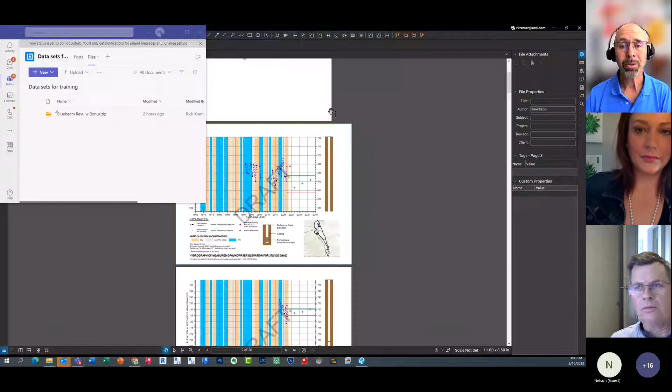This is a real case. I got a case, and this is supposed to show right here in this area a bar, right? I'm going to open up the same document in Adobe, and I'm going to show you what it's supposed to look like.

I thought, oh my goodness, Bluebeam is broken. I have the latest updates, I have the latest video card driver. Let me show you what it's supposed to look like.

I'm going to go over here on my computer and open up that same file, which is this one right here. And if you're the customer that sent me this and you're on live right now, thank you so much for sharing the information, even though you didn't know you were going to.

I'm going to go ahead and open it up with Adobe, right? Everyone has Adobe on their computer. Now let's take a look. This is wild.

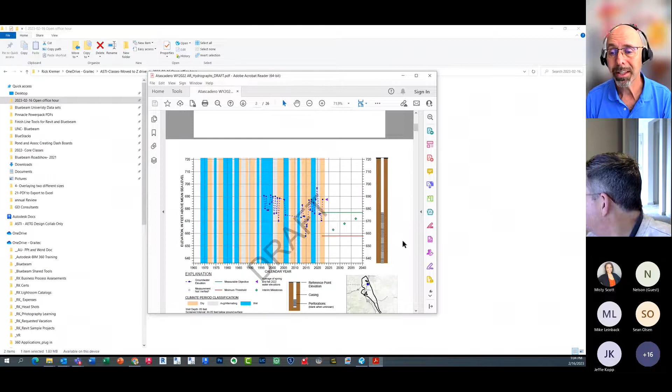I brought it up to Bluebeam and they're like, I don't know, it's something you need to change. Do you see this right here? Page 2, right? I'm on page 2 on this free Adobe Acrobat Reader. This area, I can't even do a rectangle, the shortcuts aren't the same. This area right here, you see the bars that are there?

I'm going to go ahead and split screen. Oh, we got more people. Here's Adobe, here's all of those bars. And over here's Bluebeam. What?

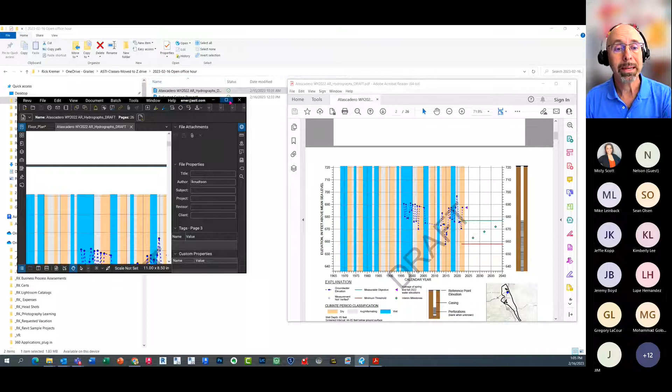And I'm trying to get these to show side by side. Anyway, you got the idea. All right, I'm just going to maximize it, but you guys see this, right? This area is supposed to have bars, and that was a big deal.

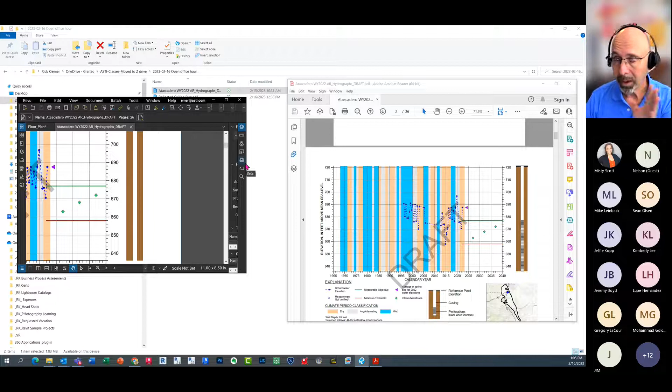This provides some information to the geotech that was being lost in Bluebeam. So here's my recommendation on how to fix this: there is what I call a feature, a bug, that isn't displaying this information correctly. It's all according to your graphic display driver, not the really good one that's in your computer, but something that the Bluebeam application isn't talking to your driver about.

I'm using the new Bluebeam Revu 21, and this was still an issue in Revu 20 and 21. If I go over here to Revu, Preferences, no, About, you'll see I'm working on the latest version of Revu. So the issue still happened in Revu 20.

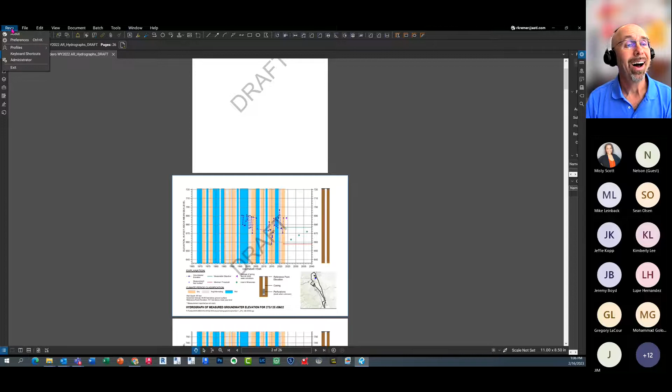So Rick, how do we figure it out? I'm glad you asked. I'm going to go over here to Preferences, and we're going to get into Preferences just a little bit, but I'm going to jump right into Advanced, okay?

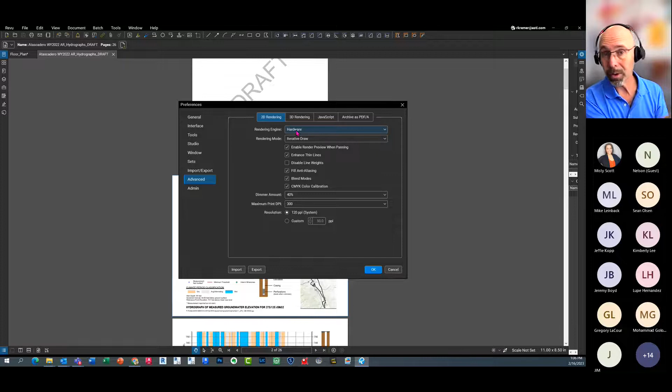Under the Advanced tab, the 2D rendering engine that Bluebeam uses is hardware acceleration. It means it's using the hardware of the video card on my laptop. Instead of using hardware, use legacy. Now watch what happens. I'm going to change it to legacy and click OK.

Did you just see what happened right there? I now have the bar.

So here's the takeaway: there might be things on your PDF you don't even know aren't showing up. So again, put on the legacy 2D driver. It's over here under Preferences, Advanced, change the rendering engine out of the box from hardware to legacy. Life is going to be better.

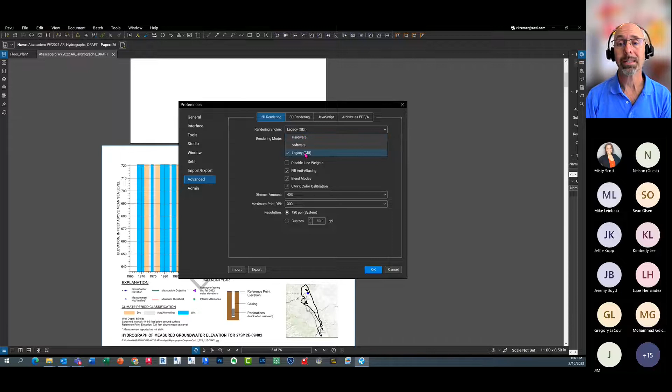I'll let you know at the next open office hours if this changes, if Bluebeam has created some type of update. My guess is hopefully they will, and how to get those updates is easy. What you want to do is every now and then go to the help menu and check for updates. I'm going to go ahead and check for updates, and it says Revu is up to date. I can tell you Bluebeam is probably working on this because that is a big deal.

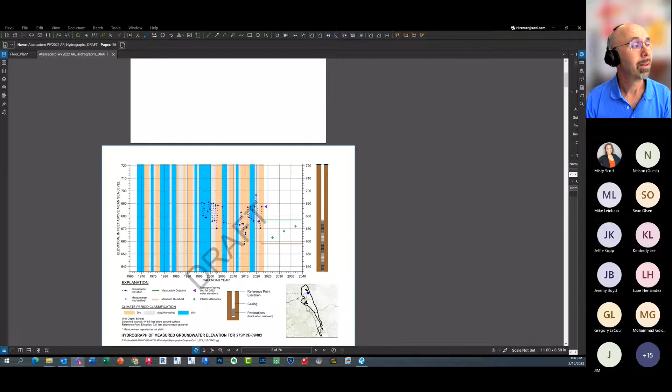So what do you all think? Drop the mic, thank you so much, good night. Let's see, any chat, anything in the chat area over here, Misty, because I am not looking at it. Do we have anyone that's going, ooh wow, yet? Not yet, but I was saying ooh wow in my head. All right, that's what I'm talking about. High five, boom. By the way, that's how we do high fives virtually now, for those of you stuck behind the computer. Boom, there you go, awesome.

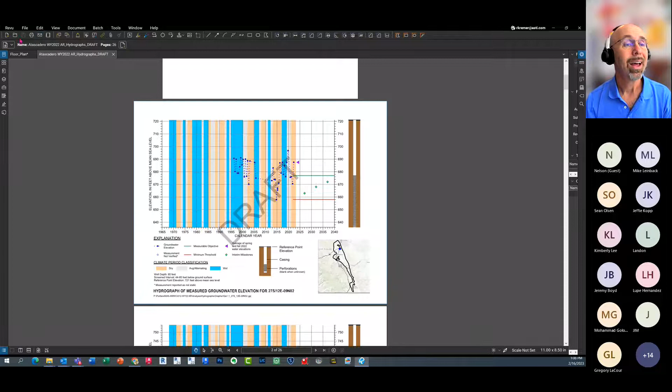So, all right, so that's one thing. The other thing, let me show you some preferences, some things that I like to change, and then we're going to get into a simple little thing of how to customize counting symbols. It's just something I was thinking of. I'm like, yeah, maybe someone wants to learn how to do that.

I'm going to go over here to preferences, and let's talk about some of the preferences that I like to set up on my Bluebeam Revu, which I think you should do too, and why it's so important. Starting over here with general. I just reset Bluebeam minutes ago, right before we got online, and this is out of the box. It uses the username over here that my computer is called, R. Kremer, right? And if your computer is called 1234, your username is going to say 1234.

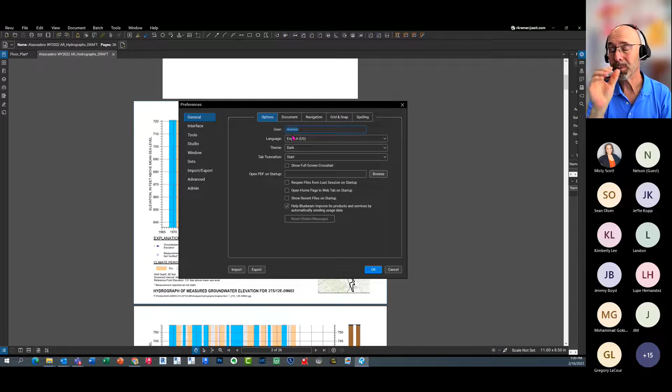Well, why should we care? It's because in the markups list down below, that is going to be what is captured for your author. So the author's name is going to be whatever is the username. So my recommendation is change this to your name. Better yet, put in the name of the company you work for. That way, when you make your markups, guess what? All your coworkers and people you send this to that are outside of your bubble will say, oh, this came from ASTI or GEI or TLC or ABC, whatever it is, you know me. So add the username and change that information.

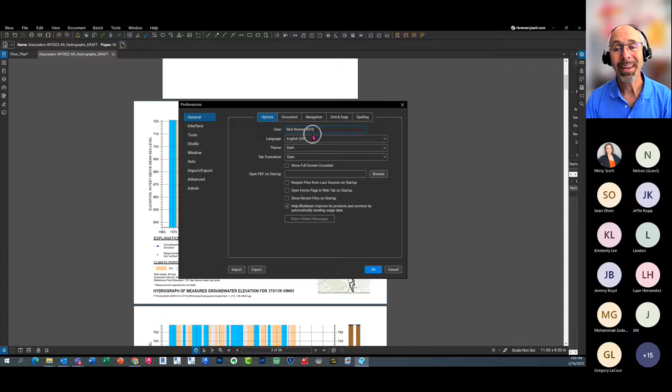Okay, another thing that I want to show you is over here under Window. Now, under Window, I'm going to go back and open up a sample drawing that you can open up on your end, and I'm going to show you something about this text highlighting and why I turn it off. All right, for now, I'm going to hit OK.

I'm going to close this file and open up a sample drawing. All right, I'm going to go over here. By the way, I don't know if you knew this, under the help menu are tutorials that are built in, 3 different tutorials. There's Bluebeam University, which is complimentary to all users of Revu 21. As part of your subscription, you get unlimited access to Bluebeam University. For everyone else, we have Bluebeam Launch tutorials that are built in, and training resources. Tutorials that are built in give us these 6 different things that we can investigate.

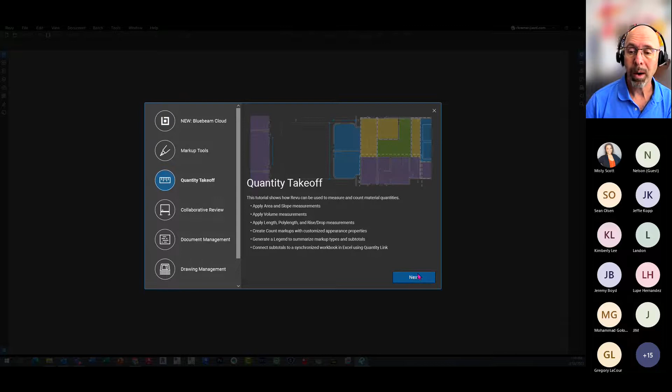For fun, I'm going to open up Quantity Takeoff over here, and we're going to open up a sample file. By the way, you could watch the video over here on your own, grab some popcorn, and learn something, and follow along with the sample takeoff file. By the way, this video right here is this file, and you can follow along. How cool is that? You can kind of learn on your own.

All right, so point being is, if I wanted to go through and highlight text, right? I'm going to go over here and turn on my profile, Revu Advanced, just so I can have all my handy dandy tools up front. And I'm going to turn on the highlighter. Remember, this is out of the box. Now, here's what happens if the highlighter is set as a default.

If you're wanting to go through and highlight just a specific name, watch this. Click highlight, and I'm sure you guys have done this before. When your cursor is not on text, it becomes a highlighter, and you can highlight all you want, right?

If it hovers over text, it changes to highlight that text, but watch what happens. When I want to click on Office, it accidentally will click on multiple things. Sometimes it will click on the break room right here. I didn't want the break room, I just wanted this. So how do we go through and change that?

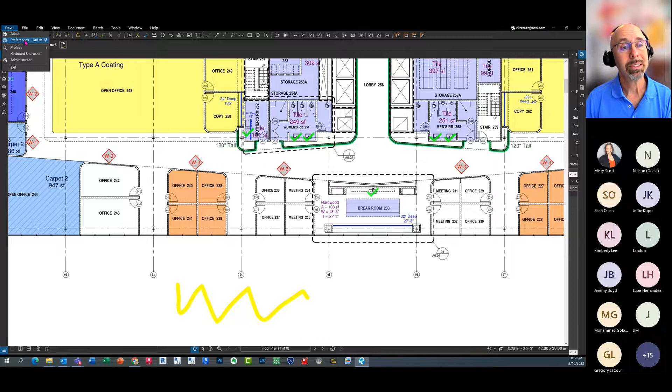There's a setting over here under Revu Preferences that tells Revu not to do highlighting, and I'm going to turn it off. This is under Preferences, Window, Tablet, of course—where else would it be? It's in the craziest place. Window, Tablet, I'm going to disable text highlighting and hit OK.

Now, using H, which is the highlighter, I'm going to put my highlighter on, and guess what? Now if I hover over the text, it doesn't become highlightable anymore. If I want to highlight the text, all I have to do is hold Shift, and I can do a straight line—hold Shift and go straight across, and there it is. Now the upside is you have the highlighter all the time, and you can highlight whatever you want.

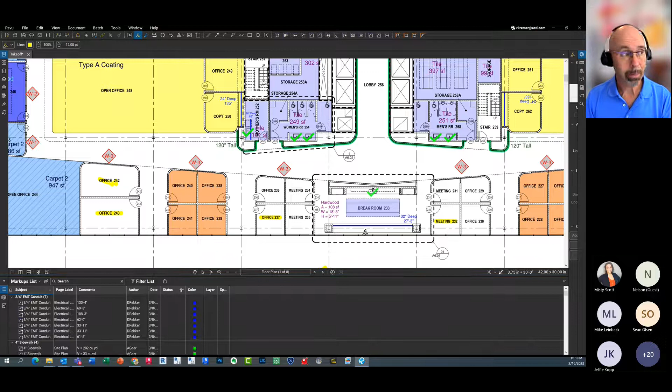One way that highlighting is used out of the box, especially if you're doing specifications—I'm going to turn it back the way it was. I'm going to go over here and turn it back on, and you'll see why this is really a neat feature. I'm going to enable text highlighting and hit OK.

I should open up a specification for this example, but now if I use the highlighter and highlight objects carefully, that information not only is highlighted, but shows up here in the comments.

So here's what happened. I have an estimator that shows me his workflow. He has a set of specifications and a set of construction documents. He highlights the text in the specification, and when highlighting it, he uses the out-of-the-box highlighter, and it comes in with this information for comments. The reason why this is important is because the estimator, in this case, is looking for something very specific within the spec—anything that says, let's say, ASTM 500.

I made up that number, I don't even know if it exists—ASTM 500. When they highlight it, quickly going through the specification, either manually or using search—search is an excellent way of searching text as well—it'll automatically highlight it, which means you can search for it.

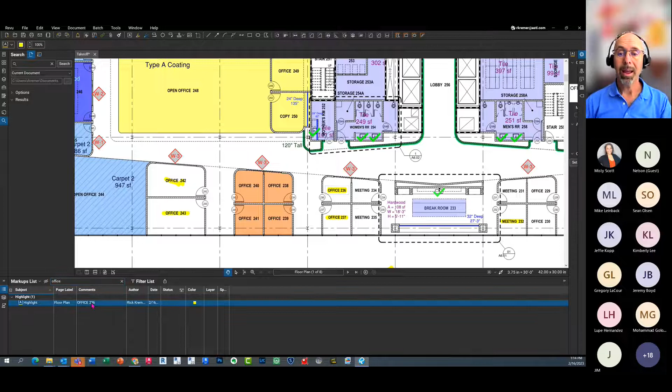Did you ever see this feature and wonder what the heck is search? Inside here, I can search for everything that says office, and anything that says office is now going to just show up in the markups list. I can click on it and find out where that is. But wait a minute—if I'm over here on a different sheet and I click on this, it should take me right to that sheet where it says offices. So that's one of the pros of using the highlighter as is.

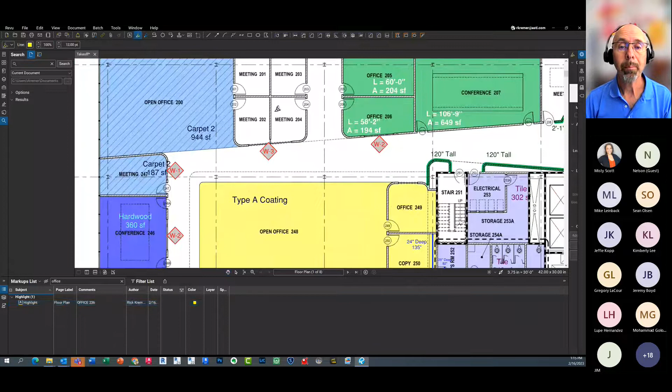I did get one question. Let me see if I can go to it real quick. It didn't come through on the chat, but I got it. The question was, for the zoom scale window alongside page count at the bottom center of the Bluebeam screen, it disappeared from my Bluebeam app—how can I restore it?

Okay, so the zoom information, if I'm understanding correctly—right now I don't have what's called the status bar turned on. The status bar, to turn that on, is function 8, F8. So on my keyboard I'm going to hit F8, and there it is. Now I have the status bar. I think that's what you're talking about, that's how we can set the scale and find out all the information.

More importantly, all of these buttons over here are snap to content and snap to markup, which I usually leave off, but I always leave snap to content on, so it snaps to these objects.

Actually, that's not what I was talking about. Oh, okay—once upon a time, where it says floor plan 1 of 8, to the left or to the right was a small window, and as I zoomed in and out, it showed me what percentage I was zoomed to. So if I wanted to see what this looked like at 100%, I could set it to 100, and I'd have a 100% view. But it vanished a few months ago, and I can't for the life of me find it. I'm gonna get back to you on that one—I don't know the answer. That is a great, great question.

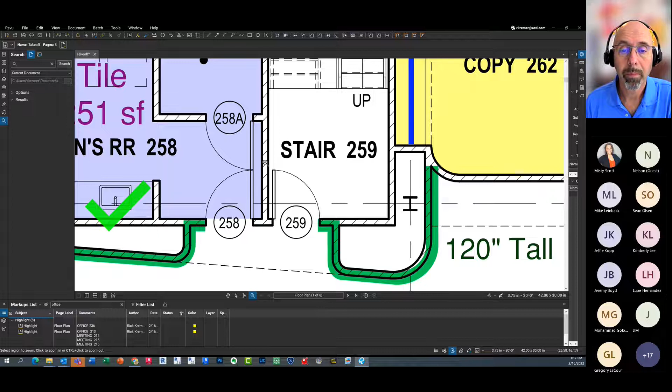Nope, not just zoom. The zoom tool. Yeah, that's the zoom tool, but it doesn't give me the percent.

I understand what you're saying now. I'll be happy to look into it. If you want, put your email in the chat area, and I'll look into that. By the way, if you have similar questions, and maybe you're shy, you don't want to ask them, or you just want to send us questions at any point in time, you can send us a question at bluebeam@asti.com. That's Bluebeam, which you know how to spell, at ASTI, A-S-T-I, bluebeam@asti.com, and say, hey Rick, I have a question I didn't get a chance to ask. Please send me an email on that zoom question. I'll be happy to get back to you on that. That's a really good one.

Rick, really quickly too, Al says there is an option in settings to toggle that. I think you right click on the options and go to the settings, or it's in the file settings.

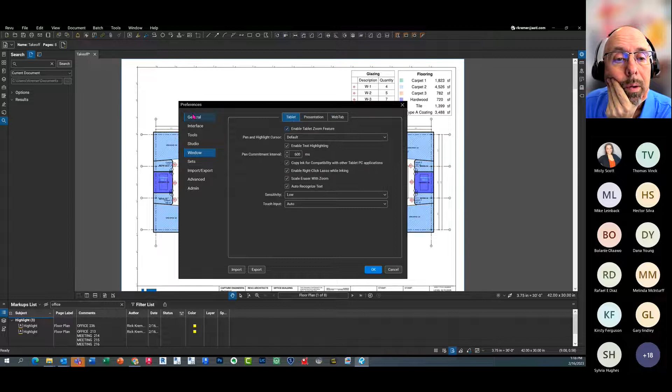See, I love this. This is where we all get together and help each other. I'm serious, this is great.

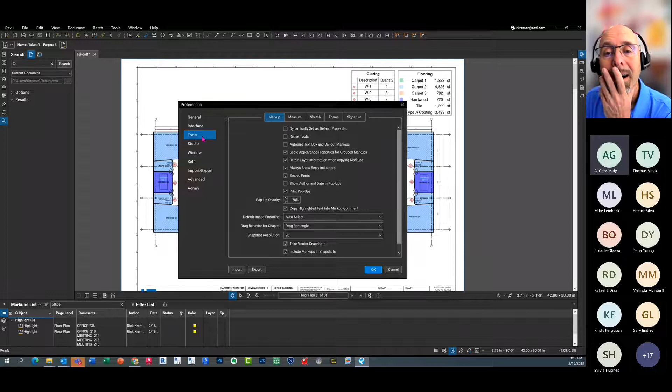I don't see it, Al. Maybe feel free to unmute, I'll be happy to share. Yeah, to be honest, I had someone help me with this because we had the same exact thing happen with us, so I don't remember the exact location of it. I want to say it was a setting in the document, set in the preferences.

Let's see if we can find it. That'd be very cool. I don't see it here. I'll scroll through mine, and if I see it, I'll pop in again. Okay, yeah, that's an excellent thing.

So other things that I want to show you all. My friend Patrick McLaughlin over at Newcomb and Boyd / Pond and Associates, one of the things that he showed me was a dashboard. I'm not going to get into dashboards today because I think that's going to be a webinar topic that I'm going to do. What he did is under General, Open PDF on Startup, browsed and created a dashboard right here, so every time he starts Bluebeam Revu, it opens up his dashboard.

If you don't know what dashboards are, dashboards give you the ability to have a landing page with boxes or images that can hyperlink to different things, which is a great way of navigating around a project or navigating to parts of files that are on your server. But it all started with Open PDF on Startup, and it opened up a dashboard. So I'm going to be showing that, I think, on my next webinar. Maybe not the next one, but definitely one of the upcoming ones.

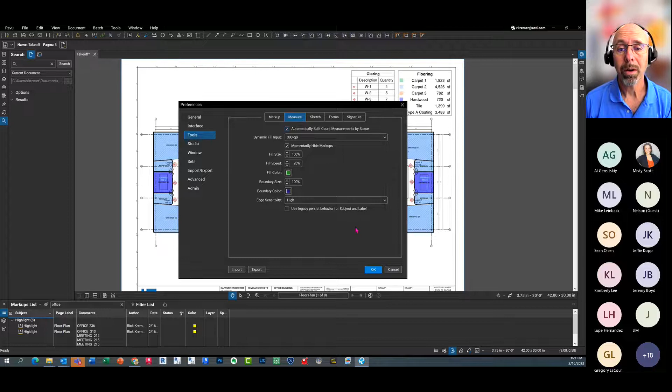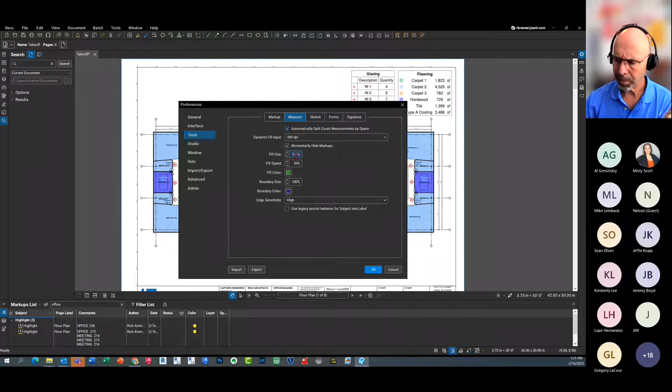Something else that I like to do is under Tools, Measure. For those of you who are using Dynamic Fill, I use it a lot. One of the things that I found is if you slow down the fill speed and boundary, you'll have better results. What I mean by that is dynamic fill gives you the ability to temporarily fill in a location with this green goop, and that paint spills to an edge. I found that if the fill speed is too fast, it's like pouring a 10-gallon or 15-gallon thing of paint, and if there's a little curb, the paint will skip over.

If you reduce this down to 20 - reduce this down to 20, that's, I guess, the lowest you can go is 20% - it makes doing dynamic fill a little easier, and the fill speed just doesn't bump so fast. So when I come over here and I do a dynamic fill, I'm going to type J to do a dynamic fill. When I do dynamic fill over here on this, it'll do it nice and slow.

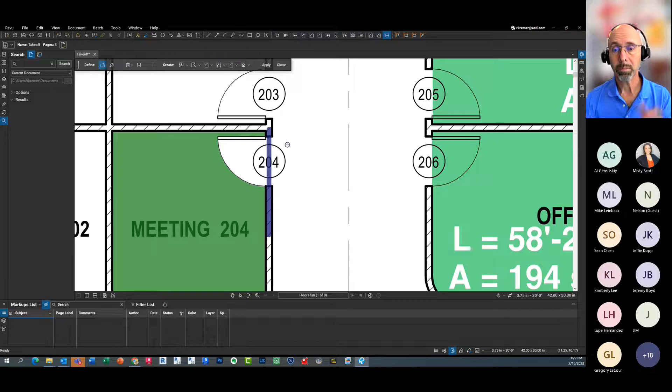Boom. And over here, if I want to fill this area in, I'm going to define it first by putting a threshold. That threshold was determined earlier on, the size, by doing boundary. So the boundary is as small as it gets, which is nice because then over here, it's the size of your typical 4-inch or 6-inch wall. If not, it's really, really thick and that will cover into the room.

And this boundary, by the way, you don't have to be clean about it. You don't have to go from point to point, overlap it, and then go back over here and do the rest of the fill. And over here, oops, I went over.

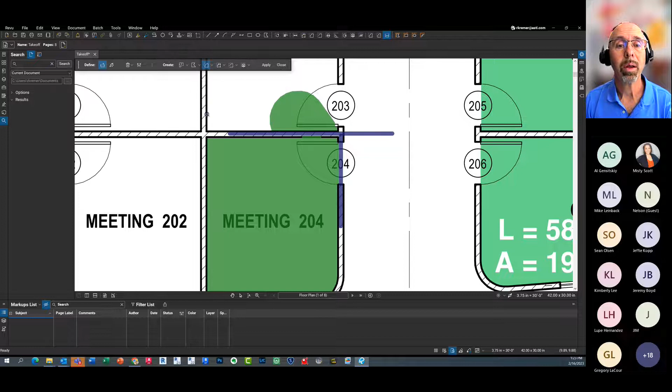Even if I went over like this and it spills over, I can use the boundary again. I'll come over here and click and hit enter, and it just cut that out. It should have removed this as well. I'll click over here to create a fill of phase 1, hit apply and close. There it is. So now I can just get rid of this guy right here. Delete, see ya.

Yay, so we did have a question come in from Gregory that says, can you highlight a wall again? And then we've got a couple more. I don't know if you want to answer that, and I can. Yeah, let's answer them right now. Let's see what Greg has. Greg, can you highlight a wall again? How do you remove the fill?

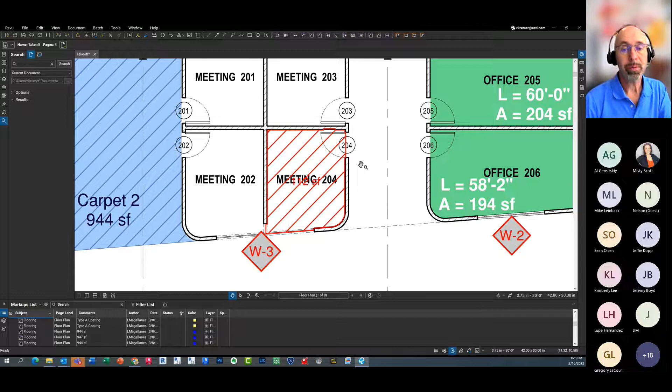Let's do that. So in this case, doing dynamic fill gives us the ability to go through and create square footages very easily, especially when you have odd shapes, like this floor plan over here, or maybe it's circular, and I'm trying to figure out the square footage of this. You use dynamic fill. The shortcut for that is the letter J.

I don't know where they got J from dynamic fill, I don't even think it's part of any of the letters of dynamic fill. So what I did first is I went into preferences over here and changed the settings within Bluebeam so that it slows down, unlike the caffeinated self that I've been drinking coffee.

I go to tools, I go to measure and reduce the fill size. The fill size is the boundary. The fill speed is how fast we're pouring into it. And actually, I'm sorry, boundary size is that 25%. That's the thickness of the wall. I'm going to leave that as is.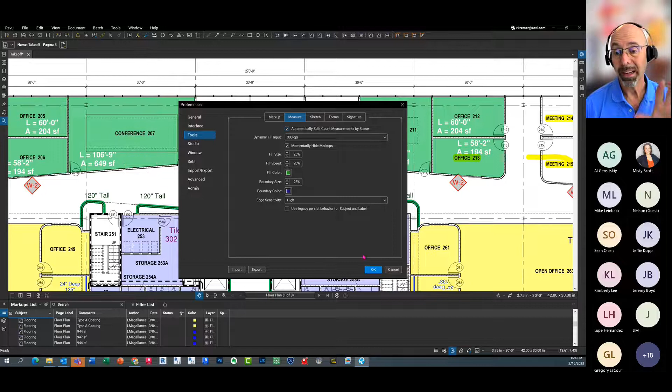And now over here, let's say I wanted to do a dynamic fill. I'm going to type in the letter J, that's the shortcut for dynamic fill. Come on, J. Sometimes you have to hit escape. I've noticed that sometimes my computer thinks it's in the middle of a command, so hitting escape kind of clears everything. Then I'll do dynamic fill. This box right here will be up at the very top, sometimes hard to see.

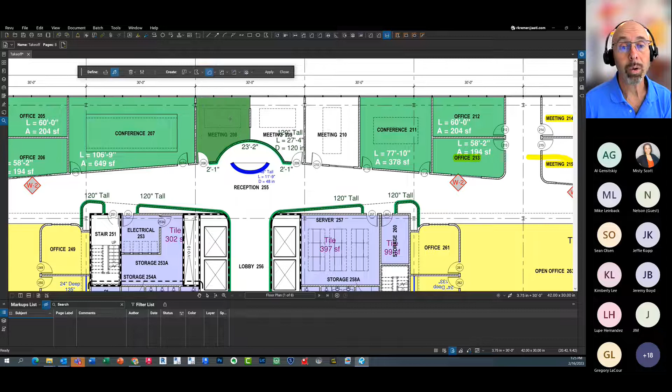I'm going to use fill and left click and start to highlight this area. Now, all I'm doing is holding it. If I go in here, think of it like this is a line. So the paint is going to hit that. If I left click and hold in this area, it continues on.

So what I'm going to do is, if I have areas that I need to redefine a boundary, I'm going to click this icon to create a boundary and come over here and go from here, and here and here and here and here. Let's just say, boom. And so now I've cut that out. That boundary, I have to go back and fill in this area. So I'm going to do fill and fill it in.

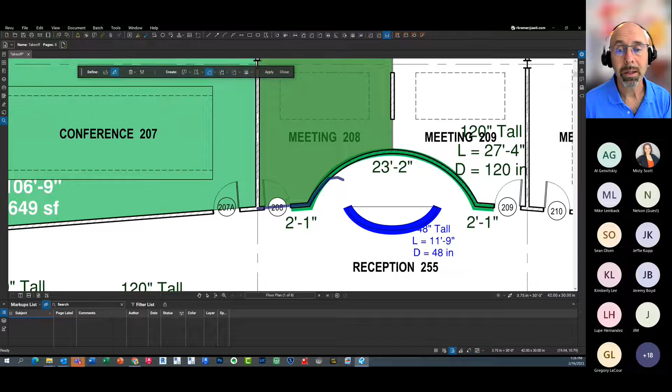Now, this green is a temporary thing. That green, by the way, you can set up to be any color you like. And then you can create from that temporary fill anything you want, whether it's a space, a polygon, or an area. For me, I always do areas. I'm going to do that.

This is going to be floor ceiling measurement. You can also do a combination, so you can do floor ceiling and a perimeter, or you can do that and a space. So I'm going to do both a space and this, so I get 2 for 1. I'll click apply, close, and now I have an area and a space. I mean, square footage. So there's my square footage right there.

Square inches. By the way, you want to see that in square feet, right? Select that object, over here to units, change it from square inches to square feet, SF. There it is, 211 square feet. Who does inches anymore? That's so old fashioned. Actually, no one does inches. So you can change your units very easily.

Oh, wait a minute, Al came up. Right click on customize toolbars. Click on the navigation, select add scale. All right, here we go. Al, you get 5 points, by the way, for that. Let's see, right click, customize toolbars. There's customize toolbars. Click on the navigation.

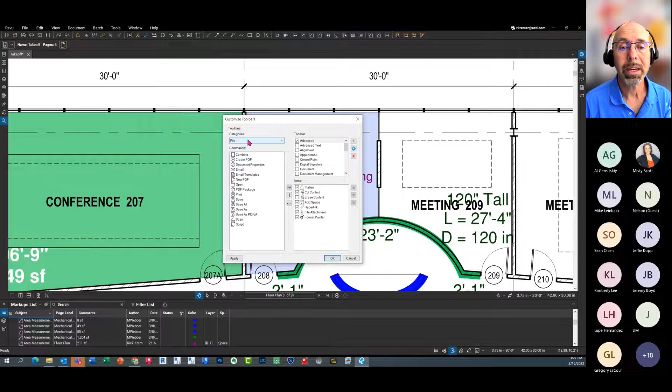If you scroll down the toolbar, specifically the navigation bar in the middle, click on it, then down below it shows everything that's part of that navigation bar.

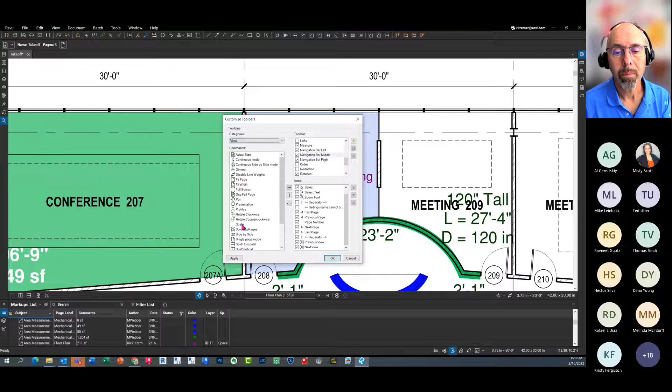I don't see scale there. So go to the top left corner where it says navigation, click on that drop down, click view, and right below rotate counterclockwise there's one that says scale. Click on that and port it over. There's that arrow, and if you hit OK, it should pop up right there.

That's your scale. Wow, Al, you get a year's supply of happiness. Misty, can we send that out to him? We'll need your mailing address. Yes, I got you right after this webinar.

Look at that. All right, everyone say thank you, Al. 1, 2, 3. Thank you, Al. That was great, Al for the win. Very nice, way to go. That's very cool, very very cool. Al, back to you at the studio. Let's see what else we got.

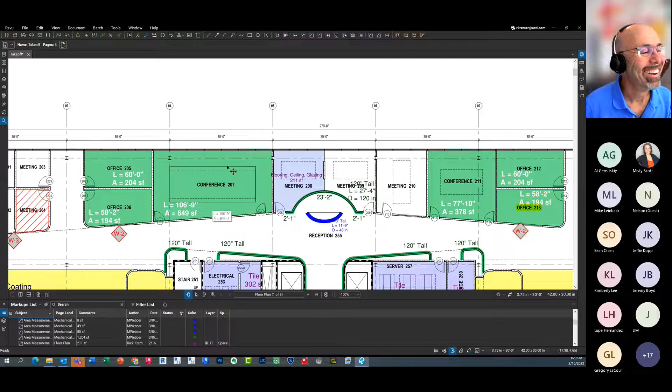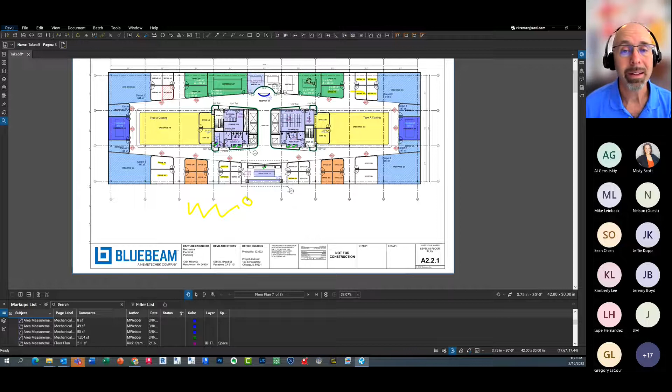Can you delete the dynamic fill? Yeah, absolutely. So we can click on it, we can move it, and over here's the room that was underneath it, and I can delete it just by right-clicking and deleting. So the dynamic fill gives us the ability to create an area without ever having to kind of go pick.

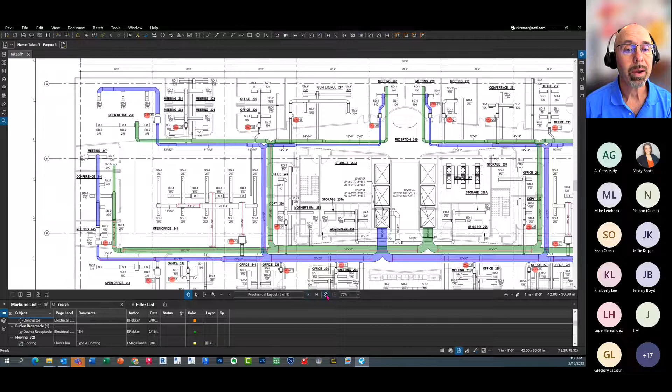Can you - what was the question? Was there a question? I'm sorry, there were a couple of them but I was going to wait until you were done. No, tell me. What's the question? All right, let's see where we left off at.

Gregory said, what is the command? And then there's two more after that. Okay, the command you write down is J. It's J for dynamic fill. Why J? I don't know.

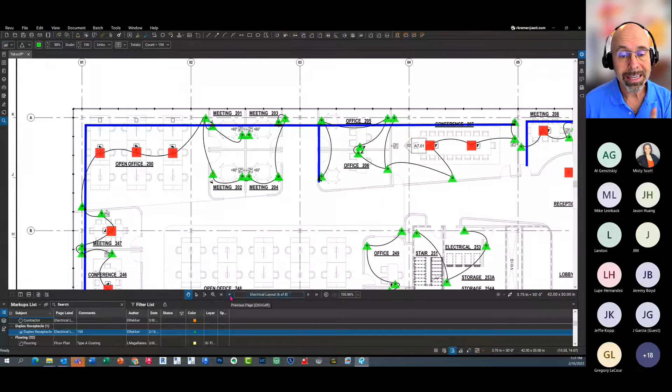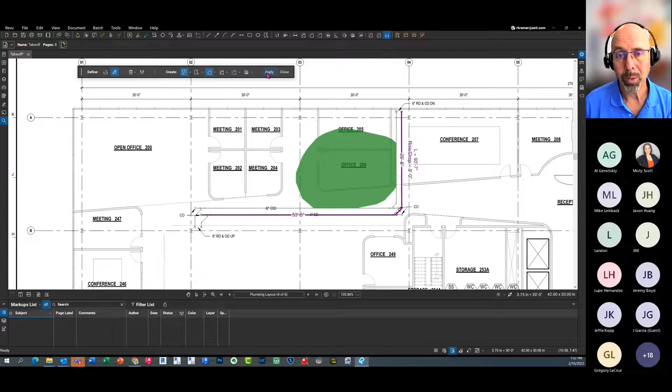The green was there when I did it on my screen, and then I tried to click on it and hit delete, and it didn't delete. Okay, so the green is temporary. If I go over here to a whole new space, I click the letter J to start and come over here and fill this in. This green glue or green gob is temporary, so you can't delete it - it's just in flux until you apply or close it. When you close it, it disappears. Oh got it, okay thank you. Yeah, absolutely, it's a temporary kind of thing.

Next question, where do you change the full screen crosshair color? Al, well, full screen crosshair color - first I'm going to look under preferences because I've seen that listed here. Honestly, I've never used it. Let's see, where is that full screen crosshairs? Crosshairs, where are you, crosshairs?

I bet you I have a question - I'm going to ask a question back. The person that asked the question, are you an AutoCAD user? Because AutoCAD users - I was an AutoCAD user and I used crosshairs that were all the way across. He says yes, sir. All right, so that's where that came from. So somewhere here, I've seen crosshairs.

Background color. How about a background color? You want to change the background color?

Sets, sorting, I saw it somewhere here. I'll give it a couple more seconds, and if not, I'm going to move on. You guys can send me your questions, feel free. I'll try to look it up to see where that is, because honestly it's something I rarely use. I don't know where that is. Anyone, Bueller? I'll also put the email in the chat for additional or follow-up questions.

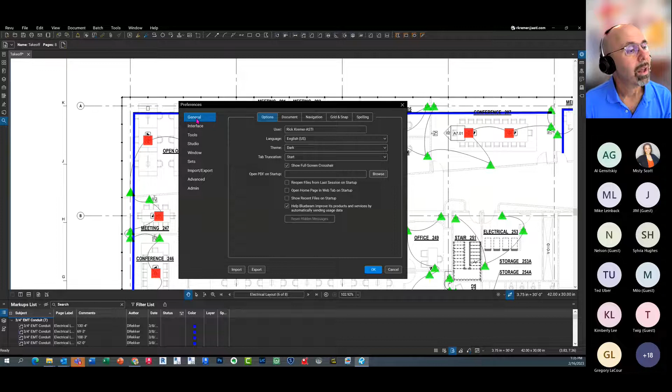I'm in the door and hardware distribution business, I think I did that right. Let me know, Thomas, if I said that right. Looking to utilize Studio for submittals, I am new to Bluebeam and looking for examples of door and hardware submittals. Can you help me?

That's going to be a little more of an involved thing. I'd be happy to meet with you one-on-one and try to answer your questions. Hit me up at bluebeam@asti.com, I'll be happy to work with you. You can share the resources you have, and I can show you how we can meld those two together. I think you'll find Bluebeam has an excellent way of taking information out of Bluebeam into Excel or into Word.

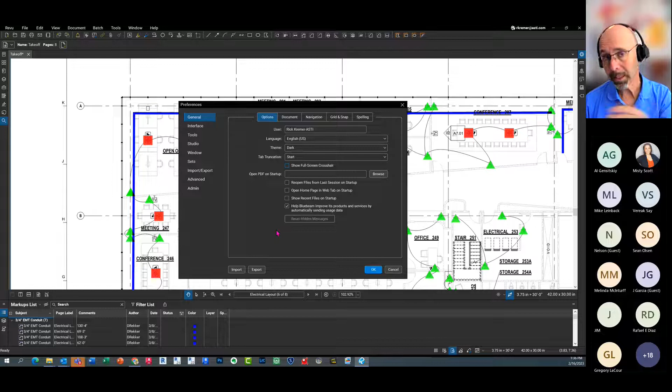Lupe Hernandez, there must be a way, I've seen it, I'll look deeper into it. Yes, please do. And if you find the answer for changing the full crosshair to a different color, sharing is caring, and I'll send you a year's supply of happiness as well. So make sure to send that information if you figure it out.

Any other questions? What else do we got? We are caught up as of right now. All right, so...

One of the common things I get asked all the time is, Rick, how do you keep your hair so nice? And I'm going to say Gillette. No, all seriousness though, the question I get a lot is: I'm creating counting, I'm counting widgets, I'm counting symbols, but I want to do a custom icon. How do I do that?

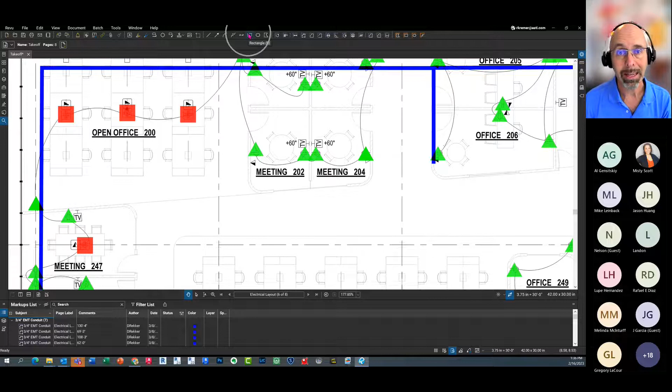I'm going to show you two different things: one is straight out of the box, changing some of the colors, and then how to create your own icon. First, let's do the out of the box stuff.

If I wanted to count data outlets, I can go over here to the search. By the way, you can search for text or do a visual search. Text search is if you have text that can be scanned—for example, if I wanted to look for everything that said 'plus 60 inch,' it'll find it like that versus having to look for TV.

I can do a visual search, for finding something that's graphic, in this case this symbol. I'm going to click Get Rectangle, zoom in, and click this. It'll show me exactly what it's looking for, and then I have the option of searching the entire file—in this case it could be 5 or 500 sheets. I could do the current drawing, the current page, or even point to other drawings that are open or in other directories.

In this case, to make it easy, I'm going to just scan this current page, and I want to count how many outlets I have, but also give it a unique look. First thing I do is leave sensitivity all the way on the left-hand side, which makes it less sensitive so it finds more variety of things. Then I click search.

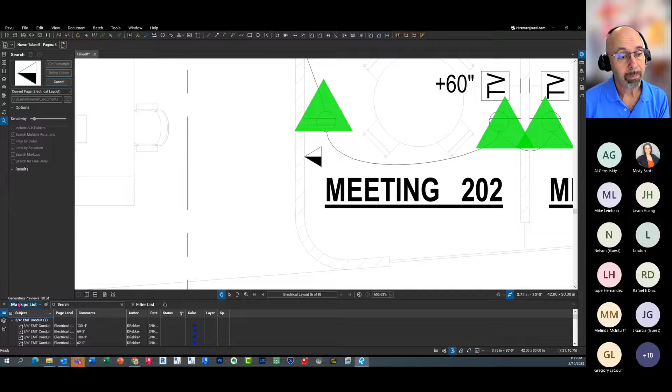This is going to go through, and down below you can see it's scanning, and it found 61 of these objects. So we visually go through and see—okay, it looks like it found them all, even the ones that are hidden behind some other markups.

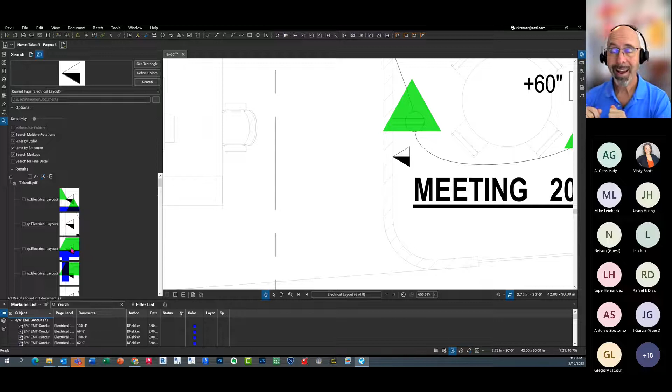So in this case, I want to go twofold. One, I'm going to show you how to create a markup using a counting symbol and how to customize that counting symbol. And then I'm going to rewind, and we're going to do a custom symbol from scratch for counting.

So over here, if I just wanted to use something out of the box, I'm going to select all, click the down arrow and say apply count. At the top row, these first 5, I can count 5 things or symbols that are built into Bluebeam. If we went through and picked the square...

So put a square everywhere that there's a data outlet. Well, first of all, it obscures the information underneath. I have a square here, but that's neither here nor there. In this case, I want to be able to see through it.

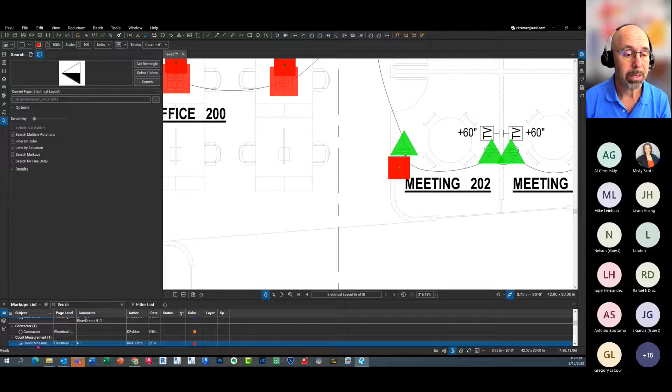So one of the things I can do, I'll go ahead and clear this out. By the way, it created a count measurement right here. Immediately, I'm going to double click, and I'm going to call this Data 1. So I know that these are Data 1, and I have 61 of them. Over here, I'm going to right click on it and go to its properties.

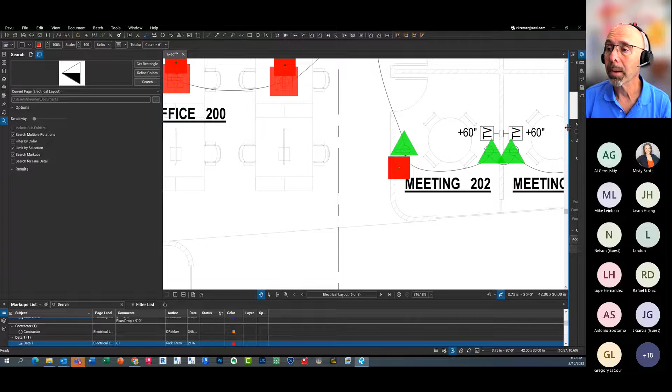Right now, I can't see what's underneath it. So in the properties dialog box, which is hidden over here, here's the shape. I'm going to change it to a circle instead because I already have something else here. And what I'm going to do is change its color, something different like yellow, and then change its opacity. Maybe I'll do blue because yellow is kind of hard to see.

And I'm going to change its opacity. You see it coming through? Now I can see it. Depending on the scale, maybe this is too big. I can change the scale and make it smaller.

Boom. Now, at this point, select it, right click, add it to your tool chest. I'm going to go ahead and add it to my tools. And now here under my tools is Data 1.

By the way, I don't know if you knew this, but in My Tools, which I consider to be your junk drawer, do you ever notice these numbers and wonder what they are? I can drag this all the way up to the top. And the shortcut for adding this is just by hitting number 2. So if I wanted to manually do this, all I have to do is hit the number 2. And there it is. And I can add them.

Any of these things right here, you can do a shortcut 1 through 9. Now, here's the thing. It'll actually keep numbering them. But I don't know about you, I only have 1 through 9 and then 0. And 0 I can't use.

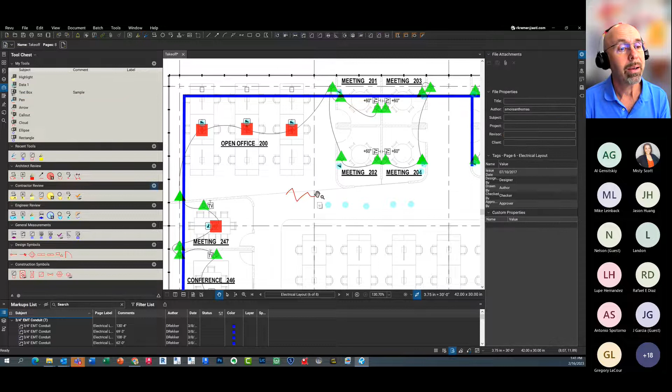But if I wanted to use the pen at any time, all I have to do is hit number 4. And now I have a pen. I hit number 8, and now it's an ellipse. Cool. All right, let me Control Z.

Pretty neat, right? So I took something that was out of the box and gave it a new subject, right-clicked, and added it to my tools. So now I can use this as a counting thing.

But let's say we wanted to customize this. You're like, Rick, I don't want triangles, I don't want squares, I want to create my own unique looking thing. How do we do that? I'm going to go ahead and remove all of these. So now we're starting from scratch.

I'm going to create a brand new symbol here for things that I want to count. I'm sure the folks on the call right now, you're counting stuff at some point, and you want to create your own unique symbol. Over here, we have lines, arcs, and circles, and closed rectangles and ellipses. Those are the two things that I'm going to go through.

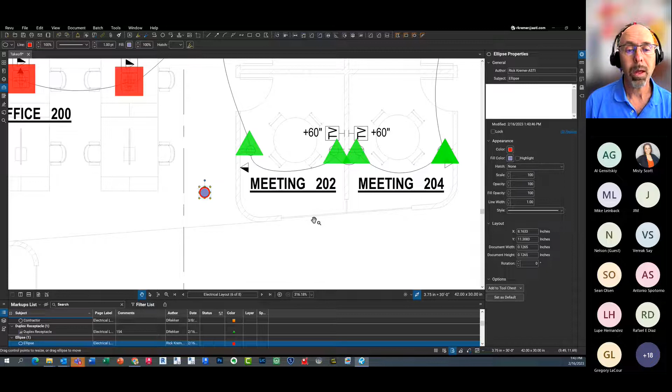First, I'm going to change its fill color to this purple and make it highlightable, but I don't want this purple - I want a different, lighter purple. I'll click on the drop down, which shows me every color available to me.

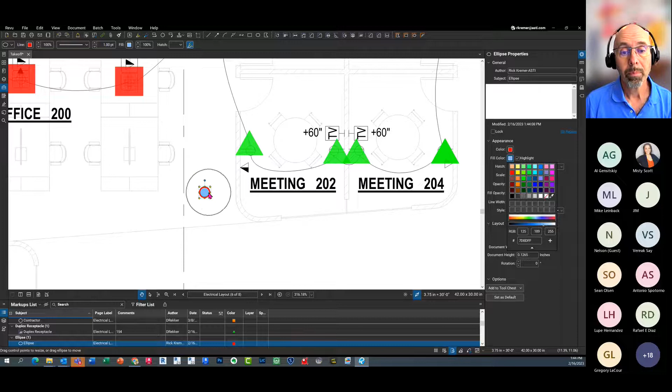I'm going to reduce its saturation. See that? Now it looks kind of more gray. Let me pick a different color - there it is. And I'll reduce its saturation again. Perfect - I want this thing to have that appearance.

Maybe I also want to have something with a line across it. So I'm going to do a line here and another line here, and put in a text box - a typewriter text - and call it a B. I'm going to make this really small.

Small b - I know somewhere in there is a funny joke and I just don't know what it would be. Get it? Ba-dum-bump. Tough crowd, Misty. I came up with a B joke and thought it was hilarious. People are muted, but they're laughing - you just can't hear them. Ted says it's a dad joke, but he loves them, so it's a good dad joke. I actually have a book of dad jokes.

So let's say we want this to be a unique thing. I'm going to window around the whole thing and group it together - right click and find group. Now it's all one object.

Sorry, let me get this. Hello? No, sorry, I can't talk right now, I'm in the middle of a webinar. Just kidding. Anyway, so you group it together.

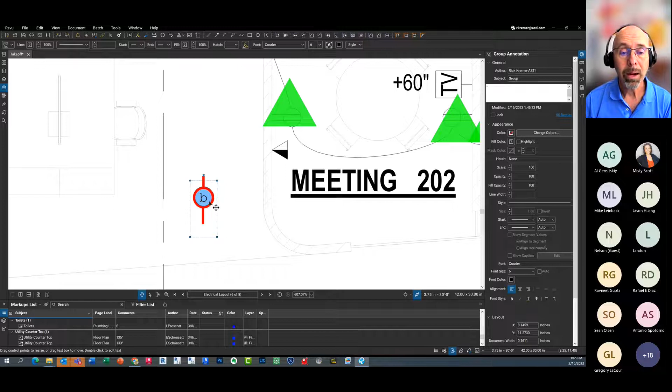Now from here, I'm going to call this something - I'll call this data B, because that's what it is. I'll right click on it and add this to my tools, or if you have a tool set, add it to your tool set. So over here is data B.

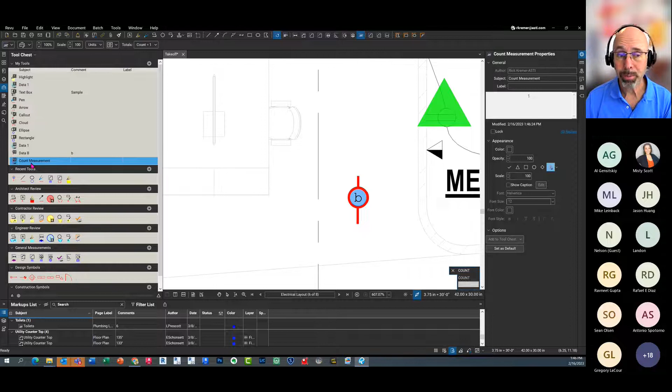I want to create this as a counting object. Right now it's just an individual object, so here's what I'll do: right click on data B and select create count. Here's the thing I wish Bluebeam would change - the information in the subject line got lost, and now it says count measurement. Click on this before doing anything, go to its properties and change it to data B.

Okay, now with this object, I'm going to go ahead and delete this. This data B is now a counting object.

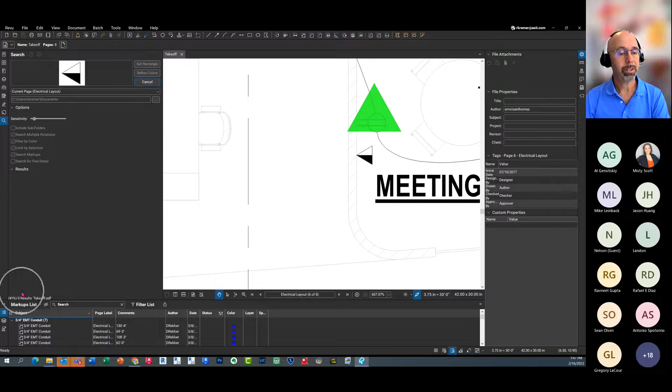Now I'm going to go through and count objects again. First let me save what I'm working on - save, right there. And I'll do a search for these guys again - boom, boom, boom, boom. It's going to find all 100 of them, or however many there were. I don't know, I lost count.

I'm going to click inside here to select them all and then click apply count. And there it is, data B, because I didn't get the other line item thing there. Click data B. And there it is. Guess what? It's everywhere. There's data B, data B, data B, data B, data B, data B.

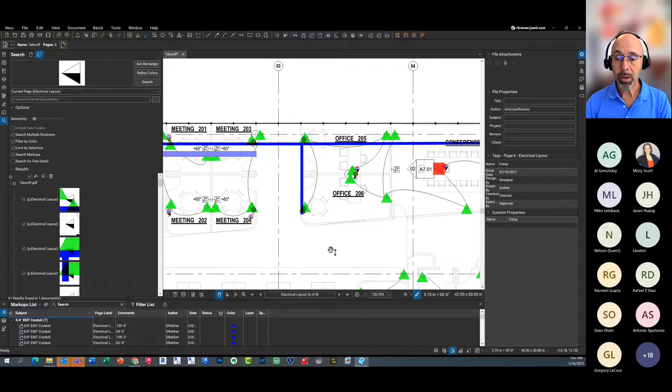So in all seriousness, this is how easy it is to go through and customize any of the icons for counting or something that you want to create as a symbol. Anytime we go through and create any type of customization, I highly recommend looking at the drawing that you're going to be creating it in.

Make sure, here's my takeaway, make sure it's set to scale. Find out what is the most commonly used scale drawing, 1/8 inch, quarter, whatever it is, and make your icon fit that size. When creating that icon for that scale, in addition to having it be the correct scale for this 1/8 inch drawing, you'll notice on some of these over here...

If I go over to a new one, maybe architect review, whatever it is, there's set scale. A lot of people don't know what this is, and I don't either - I'm kidding. Set scale gives us the ability, if we have an icon, this drawing is at 1/8 of an inch, and then I have another blow up detail that's 3/4 of an inch. Two different scales. If I have set scale on this set of tools, which I don't, then the tool it was created in at 1/8 of an inch, it knows to scale it up or scale it down.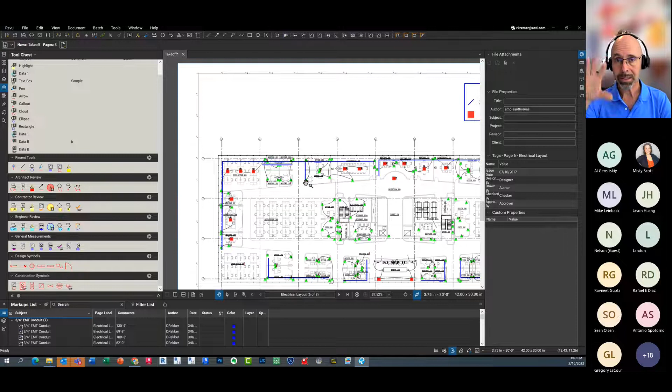You have to first create the correct scale of the drawing. Create a tool set that is set to scale. Have it be symbols that are for scale. Then when you create an object that is the correct height and size for 1/8 inch, you bring that same object into a drawing that's 3 inches equals a foot. It will adjust that icon so it grows in size, so it looks the same from drawing to drawing, even though it's a different scale drawing.

So that's it. Oh, so Lupe, I don't think Applied Software has gotten into the TikTok game yet. You know, it's kind of funny, I've been thinking about posting on TikTok, but I haven't yet. So I do need to do a TikTok, right? Do you guys watch TikTok? Does anyone? I don't know. I watch TikTok, I get stuck into the scrolling for like an hour before bed. So I think everyone wants to see Rick Kramer on TikTok for sure. You got to do it. I think so, I think so.

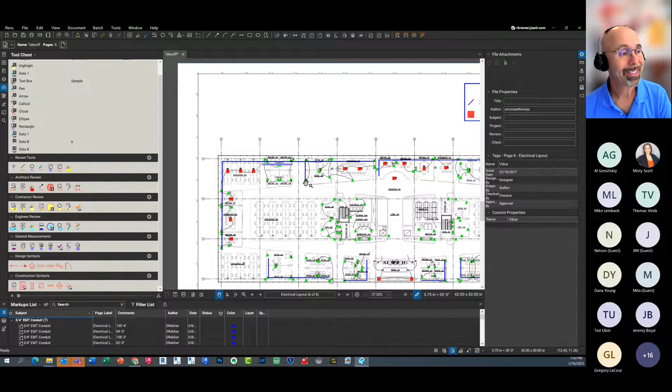Yeah, so putting information in here that is accurate is really important, and also again, customizing, right? So anything that you want here that you can draw or bring in, you can start to customize it. By the way, a lot of people go, there's an icon that I want to use that's on the web. If I go over here and let's just say, I don't know, office icons, right?

Over here, I'm going to go to images. So a lot of people think you're stuck with just the things that you draw. If I come over here and click on something, let's say over here, I wanted to find an object, whatever it may be.

I'm going to do coffee, and I'm going to use the snipping tool, which is built into Windows. Click new, and I'm going to window around this guy right here. I'm going to save this as an object, it's a JPEG, and I'm going to put it over here as a coffee break.

Okay, let's go ahead and minimize that. Maybe I should have used the cactus plant, I don't know. And I want to create that as a symbol that I want to use over and over again. So I can go over here and insert an image.

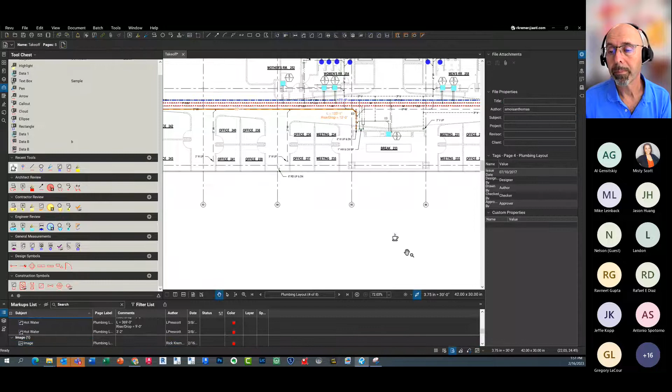And I'm going to go over here to where those images are, bring it in. Right? Now this object, I can say is supposed to be here and here and wherever it is, right? I want to create that as a new Keurig coffee maker. Select it, right click, add to that tool chest, and there it is. There's my coffee maker, and make that a count object.

So where does this come in handy, right? You're not going to put in coffee makers, but think of it - anything that you can take a picture of on the web, you can start to go through, and the sky's the limit. So if you have a picture of whatever it is that you're trying to capture, you can put that image there instead of just a round circle, right? So you can start to have more information.

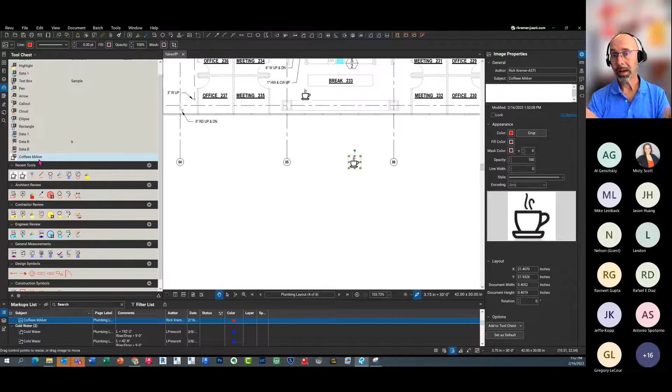I've seen people do this for fire. Here's a good example: one of my previous jobs, a long time ago, I had to create a fire evacuation plan. Have you ever looked next to an elevator? It's supposed to have a little evacuation plan with dots showing where you are, and symbols for pull stations, alarms, or strobes. Well, I can take a picture of a fire extinguisher online, bring it into a PDF, and post it exactly where I have the fire extinguishers.

Same thing with CCTV, or anything you want to show as a diagram for planning. It makes it really nice, and people are going to be impressed. They'll say, wow, how did you do that? Tell them it took hours and hours and you need the rest of the day off, when really it only took minutes.

Stay away from TikTok, Nelson says. What other things do we got, guys and ladies? Kimberly, Jeremy, Mike, Al, Nelson. Anyone? Bueller? What kind of issues have you come across recently and wondered, hey, could Bluebeam do this? We got a couple more minutes.

All right, if not, I'm going to have to roll out the dad jokes, Misty. Well, you've got plenty of those for sure. I think we'd go over time at that point, but I did want to share a slide with everyone. Oh Jim, do you have a question? I saw your hand go up. We got a couple of questions coming in - they're like, wait a minute, we don't want the dad jokes. Why not? Oh gosh, Landon says, can you create different tool sets? And yes. Jim also raised his hand, so I'm going to go first with Landon.

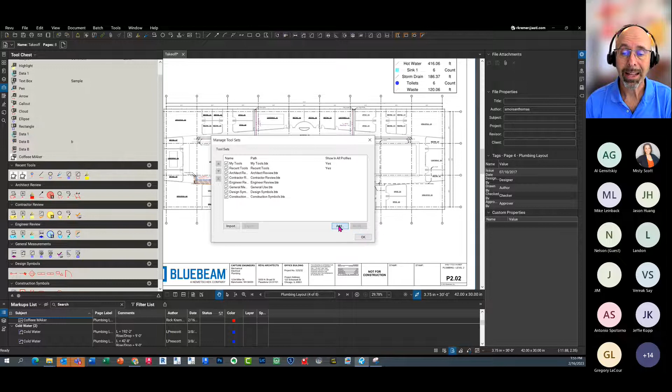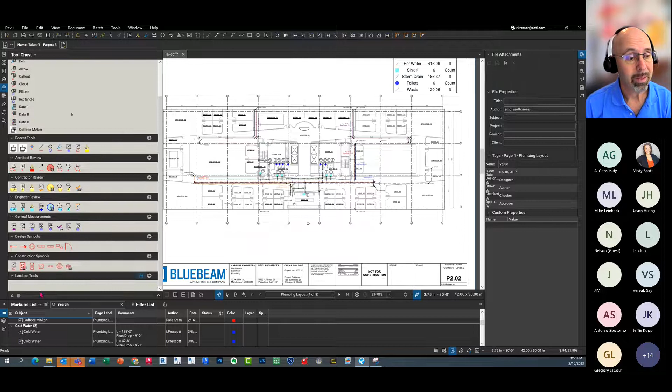So when I click add, I'm going to give it a new name - Landon's tools - and hit OK. Now, where this is saved is where the magic happens. Save this somewhere on the network, not on your computer, so other people can get to it, and then they can just import it in. I'm going to put it over here under office hours, hit save, hit OK, and now there's your tool set. You'll notice it's locked - let me give you the key.

Click to unlock it. Now we can open the drawer and I can put those objects in, whatever they are. Right click, add to tool chest, Landon tools. You're going to want to go through and change your settings to detailed view so you can see exactly what it's called.

All right, Kimberly, thank you so much for joining. Folks, that was how to create tool sets and share them. By the way, you can share these with others - you can email them. All you have to do is go over here and save, because you just updated that. And do you want one from another location?

I like this coffee maker. Left click and drag it right over here, and there, now I have the coffee maker. You want the sink first, just move that, and now you have both of these. So if it exists over here, you have the ability to drag it from other tool sets and then share it with others. So I'm going to go over here and save it and then export it.

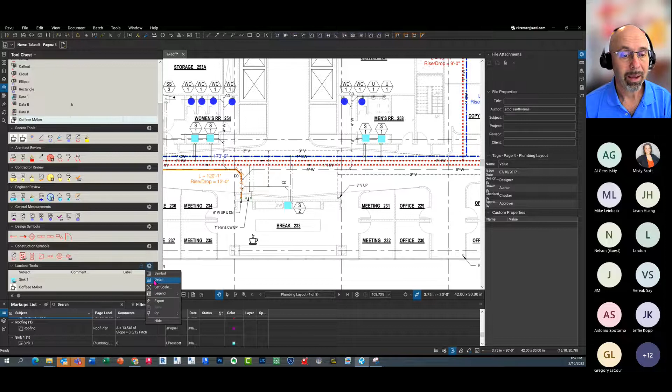When I export it, I'm going to put it in a unique location like my desktop, and from there I just email it to someone. Landon, if I were to email this to you, all you have to do is double click on it and it installs it from Windows, or you can link it in.

All right, Jim, what's your question? I can see you got your hand up. Do you want to voice your question? Can you hear me? Yes.

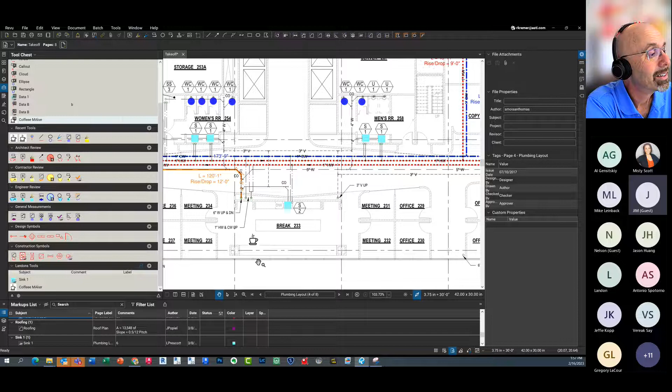If I want to use variables for I-beams from W8s to W10s, is there an easy way to count them automatically? Yes, so what you want to do is, when you're counting your beams—feel free to email me and I'd be happy to take a drawing you have and show you one-on-one. Your structural beams would be called W10, W5, whatever the number is. Use the search feature to go through and identify those things, but you'd want to create your custom W-whatever ahead of time.

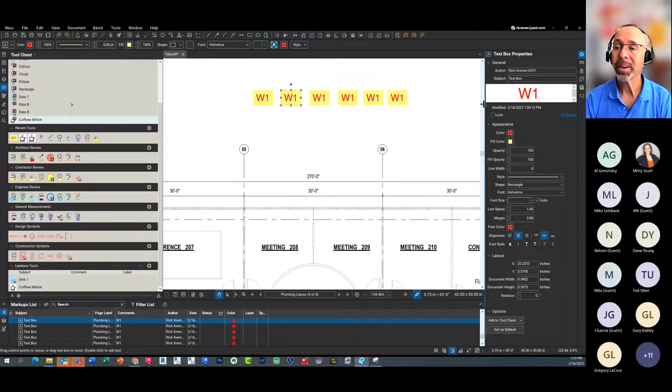So you basically start a catalog of your shapes and sizes that you can add to. Let's say I do something simple, like a text box. A text box gives me the ability to put in W10, W1. I'll make this a text box by itself, and now I can give it a color. If I want to quickly make a bunch of them, I create one, hold Control and Shift to make copies—Control to copy, Shift just because I'm detail-oriented, to make sure they're all in a line. Then I can change that to be a W2.

Okay, can I go to the next question? Yes. If it's a W12 by 26, and it's 30 feet long column line to column line, how do I get the 30 feet and the W12 by 26 to work together and generate the total weight on the job?

A little bit more of an involved question, but doable. What you can do is use what's called a poly length, which gives you the ability to create this line. You can create custom line types—so instead of saying 'gas,' it would say W-something-or-other. That information then gives you the total length. So if I go to columns and turn on length, this tells me the total length.

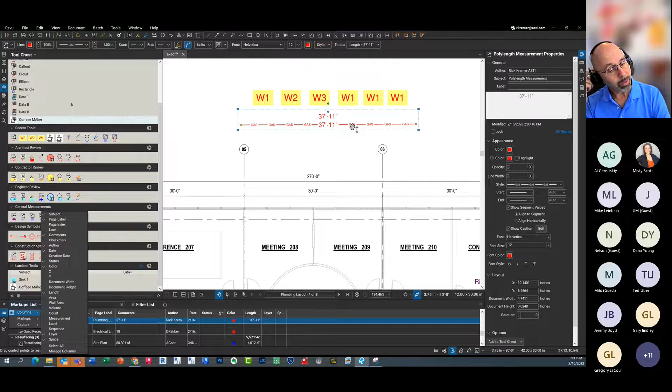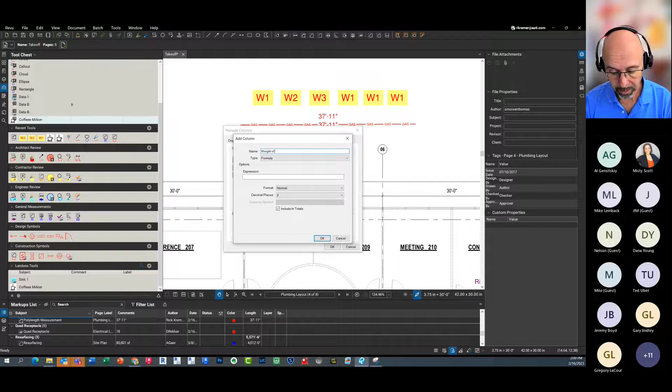Now, for weight, you'd want to create a specific formula. So we go to manage columns, do custom columns, and add a formula. We'll call it weight of column—I misspelled it. Then we'd say, let's say it weighs 5 pounds times whatever the linear length is, so I'll say times length.

I don't know the exact weight, but there has to be some weight per linear foot. Then this will automatically calculate it—if you can do this type of formula in Excel, we can do the same thing in Bluebeam. So we get the linear calculation, but also a new column that gives us the weight.

Okay, all right, thanks. Thank you. Yeah, absolutely, I think that's time, right? Yep, we're right at 2:01. We do have two more questions, but I can circulate them to you, and you can answer them maybe on the next office hours or via email, either way.